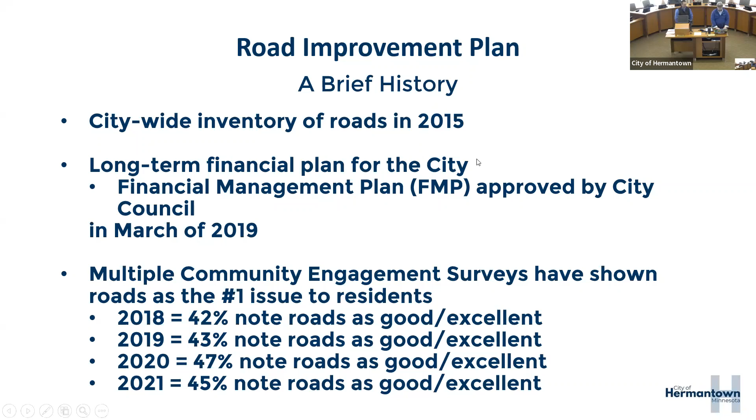We've done multiple surveys, and we'll do another one coming up this year. I would wager it will tell us pretty much the same thing. There's really a number one and 1B issue that are sources of heartburn for our community, and roads is usually 1 or 1B. As you can see in the last four surveys we've done, we can't quite get over the hump of getting 50% of folks to rate our roads good or excellent. That makes sense when you consider our roads, and it's part of why we've done these particular types of road projects. The other piece, in case you're wondering, is parks, which will come up. That has a little to do with why we've done what we've done with the Community Recreation Initiative, a separate total presentation.

But again, if folks have questions about that at the end, I can hang around and answer. At this point, I'll turn it over to David and let him walk through some history on how we got to where we got before we take a look at Hermantown Road.

Thanks, Joe. Again, I'm David Wolf, I'm the Hermantown City Engineer.

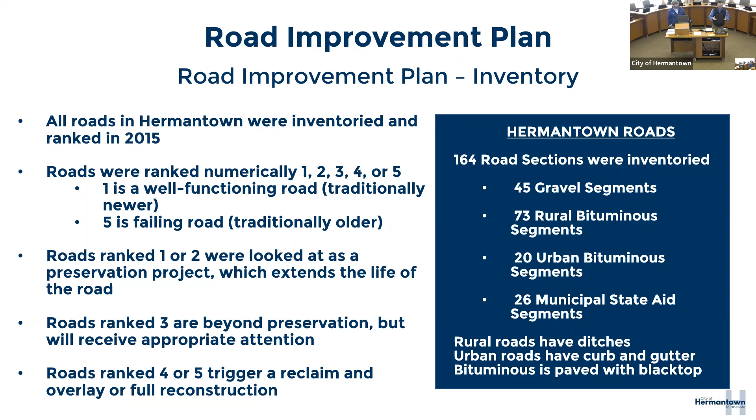So as we looked at the ranking of each of these roads, we looked at what method we could use to restore them, enhance their longevity, or, if they're far gone, reconstruct them. As we move forward with our road improvement plan, we focused on the roads ranked 3, 4, and 5, which have failed or are getting close to failing. There are different improvement strategies we can implement for each of those rankings.

So going in order from ranking 3, 4, and 5, we have these different strategies. Mill and overlay would be an improvement strategy for a road ranked a 3. Mill and overlay is where they grind up the blacktop, put it in a truck, remove it, and then repave it. That's what the county is going to be doing on Haines Road this year.

A reclaim and overlay. Let me back up. Hermantown Road and Old Midway were ranked 4 and 5, depending on the segments we're looking at. As we put together a feasibility study and looked at improvement strategies, there are two different strategies we're planning to implement on these sections of road. One is a reclaim and overlay, where they grind the blacktop up with the underlying base, spread it out, compact it, bring in more class 5, pave it, and do some ditch work and new driveway culverts.

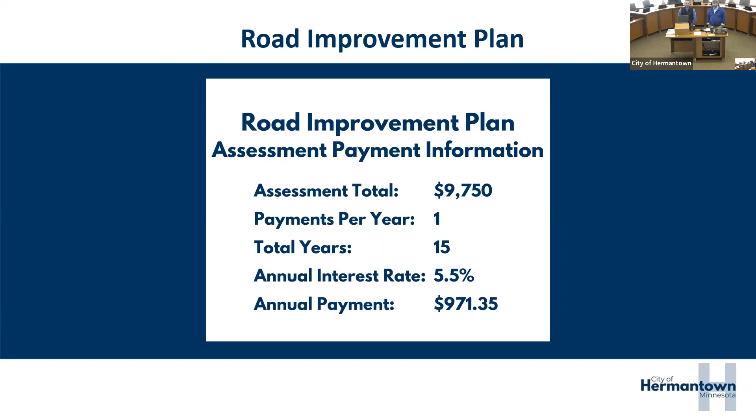So in your case, and the question again at home, is exactly what we're talking about, unique situations of ownership of potentially multiple parcels or whatnot. So we would sit down with you one-on-one and say, all right, this is what makes sense for your particular property. Because in that case, whether it makes sense for it to be three, two, or one, we just want to take a look at it.

At this point, early in the game, what's really important is we want to open up dialogue, because that's going to be a conversation with me and David as your touch points to help figure that out, if one assessment is appropriate. In most cases that we've been able to work to that, that's the goal. But there are folks, like I said, who, hey, we own our parents' property right next door. Well, that's, yep. And so we really want that to be on a case by case basis so we can get to know you. That's one of the biggest pieces that we come out of, especially in the early meetings.

A reminder that this project is slated for 2024, so we have a ton of time to get to know each other on these parcels and pieces of property, to understand how you use them and how they operate in real life. The example we always use is over on Johnson, Portland, Carlson where 3 properties made sense to turn into one. But there was a resident on Swan Lake who had 2 separate parcels adjacent to each other used for 2 separate things, and it made sense for that to be 2 separate assessments. So it's case by case. We won't answer that on the fly for you now, but if you hang around afterwards, we can take a look on the GIS. Any other questions about this?

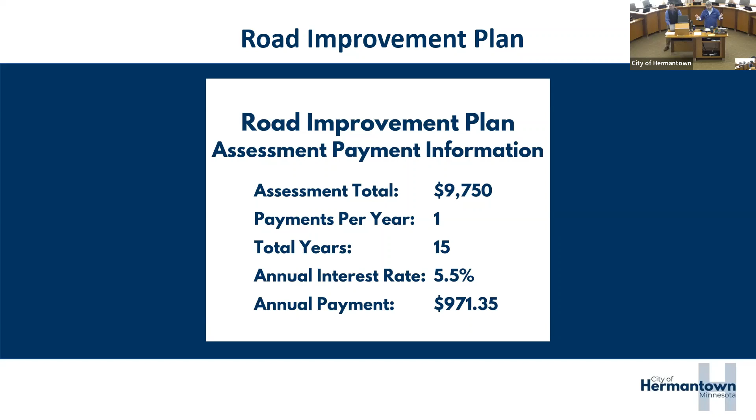For all of those, definitely folks online and your neighbors who aren't here - because we know we've got a good crowd, which is great, but not everybody's here - if there's a one-on-one my property question or my situation, absolutely come connect with David and I at the end of this meeting or as we go. Here's a perfect example: you two are in totally different situations. What's your address?

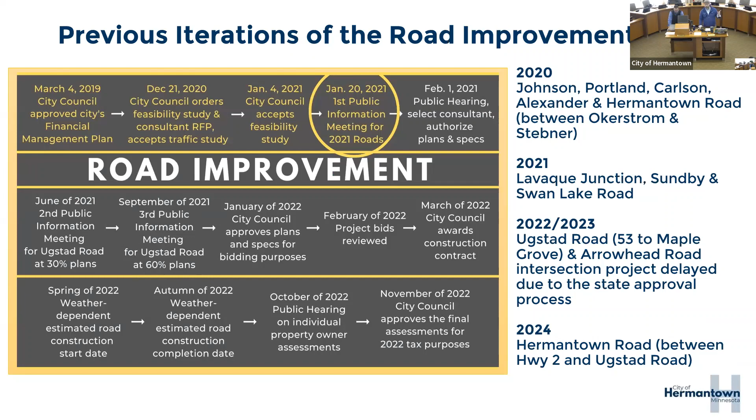Any other questions before we kick into some specificity about your guys' project? Again, I showed you at the beginning that slide - this is really the roadmap to our roadmap. So this is the order in which things will happen, so you know you have multiple opportunities to be part of this process, to talk about what works, what doesn't work. We'll guide you to where we talk about the assessments, in terms of even having individual hearings on those. But today, as you can see in the circles, April 6th, 2023, is our first public information meeting, either at the end of April, the next April meeting, or the first meeting in May.

We'll have a public hearing before one of our city council meetings about selecting a consultant, authorizing plans and specs. All of those particular meetings are first and third Mondays with a few exceptions for holidays. All of the agendas for those are posted online the Wednesday before. You can also always call me and say, hey, is there anything related to this project on the menu for the next meeting? So that's a perfect example - we're not quite sure if that's the next meeting or the one after, but that one will be in.

We'll have a second public information meeting for this project at the 30% plan. That'll be at some point this summer when David has those planned out at the 30% level, to be able to get you guys a picture of what is happening on the road, kind of right in front of your property, as well as what we're doing as a whole.

December of '23 it'll be approved for plans and specs, all the way into February of '24, where the project bids will be reviewed. And then you can kind of see the construction schedule into 2024.

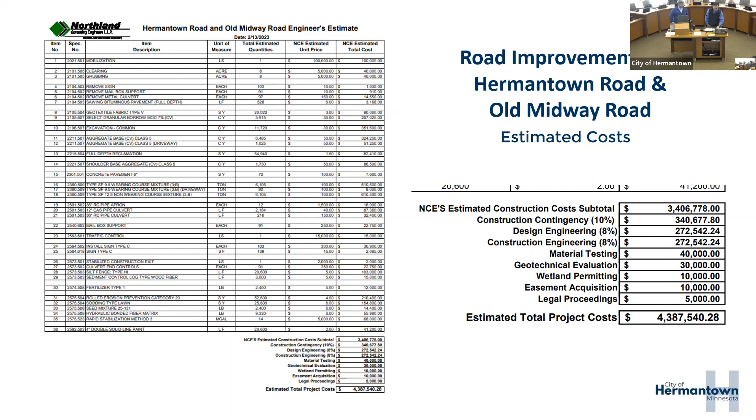So, I mean, it's a good question, and it's hard to accept and understand the answer, but that's why it's like that.

Well, there's 4, I'm looking at it, there's 5. There's 5 parcels. There's 3 on the west side and there's 2 on the east side.

Good question. Hopefully we'll have an answer at the public hearing for that. And the reason we don't have an answer for you is up until this point, all of the road improvement projects have been residential only. We have not had a commercial property. So we are aware that we need to address that, but we don't have an answer for it right now.

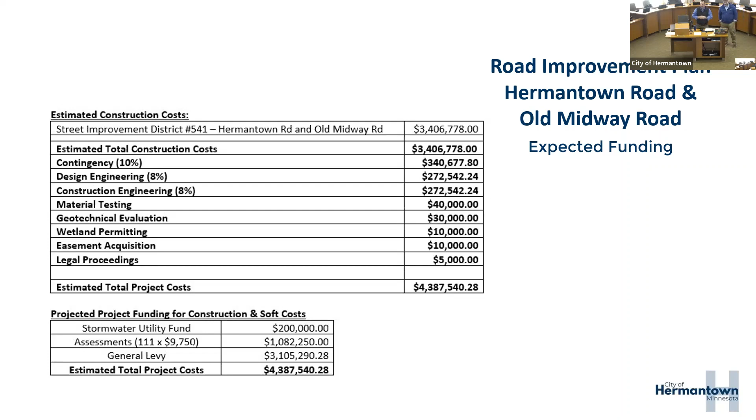Okay, I think we had one right. Go to the cabin for 3 months.

No, but seriously, we've done this routine many times, and your properties here are easier than some of the other projects where they're dead-end roads. Those are the hard ones we have to deal with.

So when we sit down with the contractor, we'll let them know that the expectation is at the end of every construction day, residents should be able to get into their driveway. That doesn't mean during the course of the workday that you'll be able to come and go freely.

We've also had scenarios with wedding events, grad parties, and if we know that's going to happen ahead of time, we can accommodate you the best we can. The good thing about this project is we don't have any deep utilities - we're not digging 8-10 feet down to put a pipe in the ground, we're working in the upper 2 or 3 feet with ditches and the road. So there will be some inconveniences, but we won't block you out of your house or driveway for a week at a time. That's the best we can do.

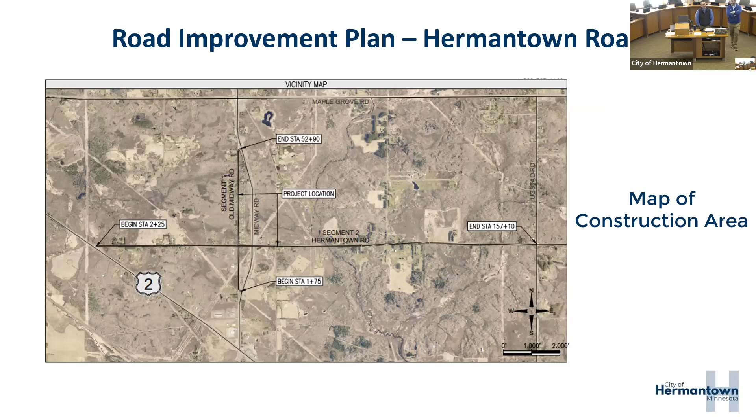Just wondering, are you using the exact same equipment, or what is it now? So the question is, will the road be the same width as it is today? Nominally it's going to be wider. I don't know the specific answers until we get our survey done, but for the most part it's about the same width. Our standard is 24 feet of blacktop, so two 12-foot lanes, and then 2-foot gravel shoulders. So from shoulder to shoulder it would be 28 feet wide.

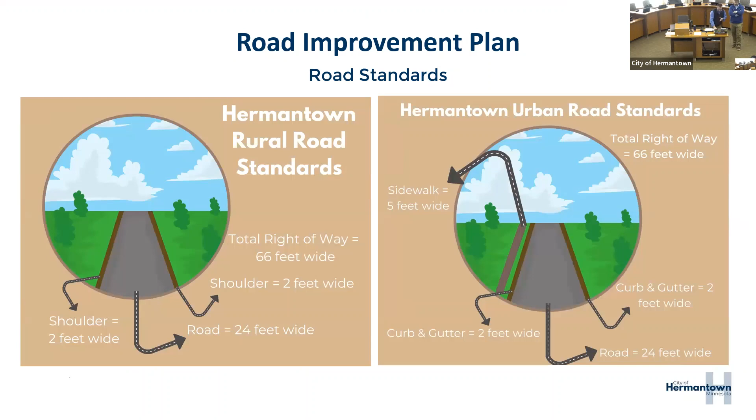And then the ditch side - so the ditches, let's see here. It's hard to see, but on the bottom right you'll see the ditch. So once you get to the edge of the shoulder, we go down at a 3-to-1 slope, go 3 feet deep, and we have a 2-foot ditch bottom, and then back up.

Well, let's be clear - the city has a 66-foot right of way. So if a tree was in that 66 feet, it's technically the city's. Anything beyond that is on private property, which would be considered... you don't know. No, we own the road, we don't own the frontage.

I know why you sat in the front now. Pardon me? No. Yes. Yeah, so.

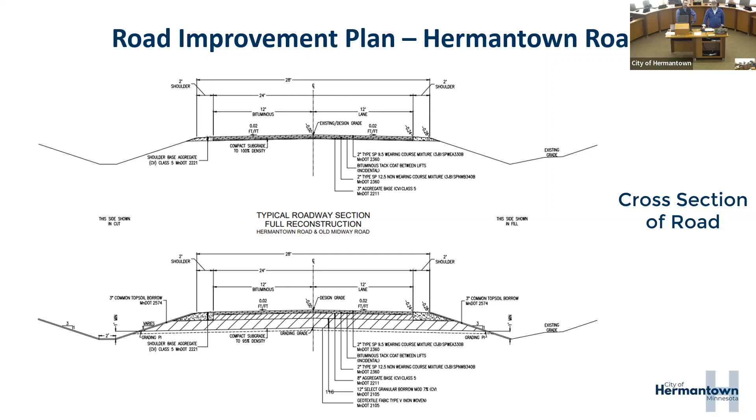Other questions? These are really good questions. We made it all the way through.

A lot of the best parts of this - the goal today isn't only what we've outlined, but to start really making the connection so you know who you're working with. As you have questions that come after today, or 10 minutes after you walk out the door, or over the next several months, you can reach out to me, David. Both of our contact information is on that road's website. All this information will be updated there. Any significant processes, you're going to see another mailing from me. As we get closer to 2024, you'll see that. If you want a taste of how these weekly meetings work, David and I are going to live on Ugstad Road all summer. You'll be able to see on that same page those updates, so you can get a feel for what that's like on a project of this level of significance. But yeah, reach out and ask whenever. Jonathan.

The next official meeting on this will either be the third Monday in April, which I believe is the 17th, or the 1st of May. If that changes, the best way you'll find out, because I won't mail out 111 letters about that, is the Wednesday before the Monday we'll post the agenda and you'll see it there.

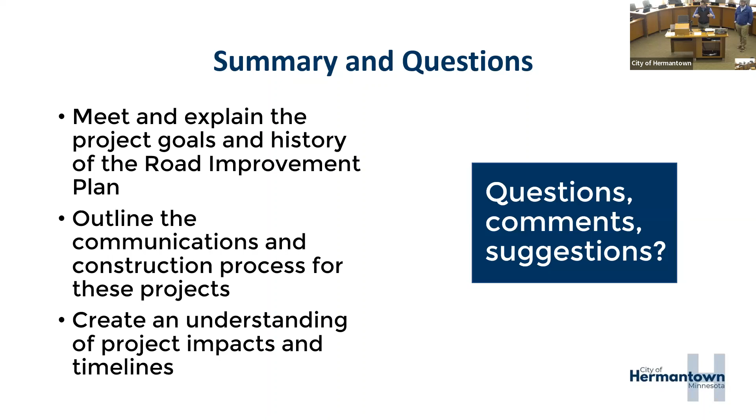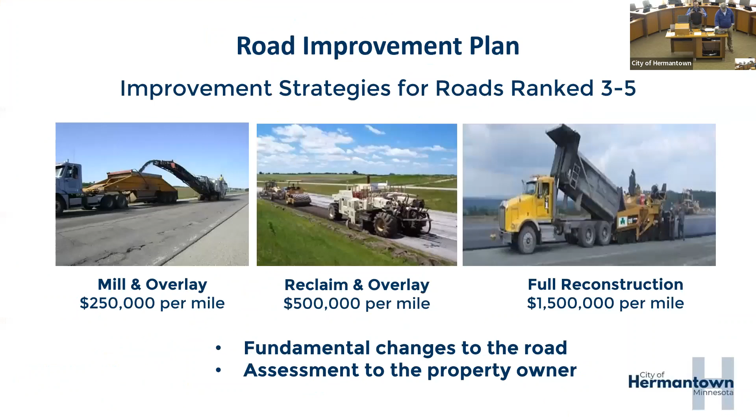And like I said, once we complete the 30% plans, we'll have another meeting - I'm not sure if it's gonna be a public hearing or public info - so we'll have another informal meeting like this where we have 30% plans. We'll go through our findings and our recommendations, and then we'll answer individual questions.

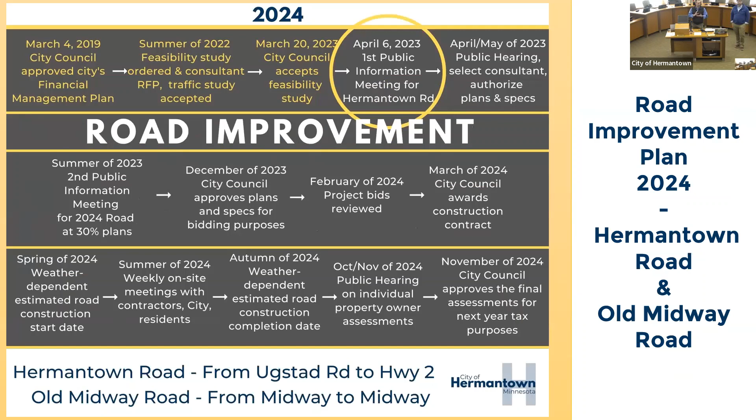And things we need to know as we design - one of the big things out here would be if there's any drainage problems. I got water ponding in my ditch in my front yard, or I got a sump pump that discharges and we got to make sure the ditch picks it up. Stuff like that we need to be aware of as we're designing it.